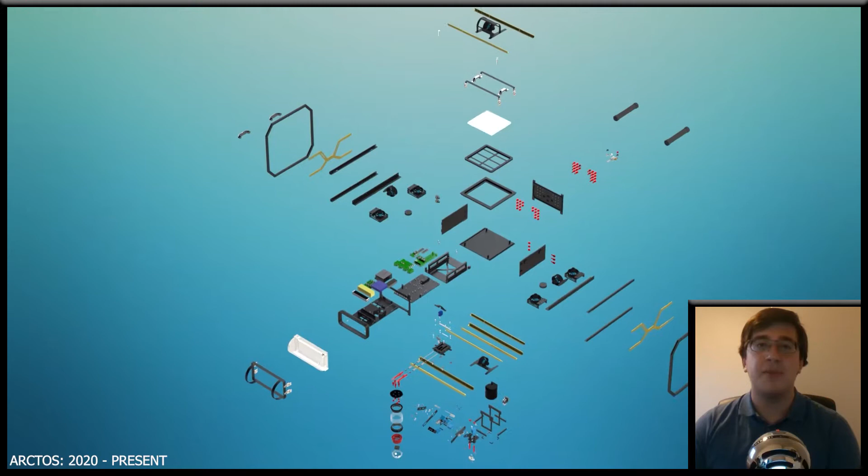ARVP. Hello, I'm Drew Del Ciopo. And I am Jared Schroeder. We're both in our fourth year of mechanical engineering. We're the mechanical co-leads for ARVP. Throughout the past year, we have designed, modeled, and manufactured Arctos, our competition robot for RoboSub 2021. Throughout the past year, we have planned, designed, and created to ensure competition readiness of our new robot, Arctos.

Last year, we unveiled Arctos, ARVP's newest creation in a long lineage of autonomous vehicles. The hull is the backbone of our AUV. In order to achieve an efficient hull design, several criteria must be met. The hull must be structurally sound, waterproof to safeguard electronic components, and it must contain enough space to support all critical subsystems, including our torpedo launcher, robotic arm, electronics trays, cameras, DVL, propellers, and more.

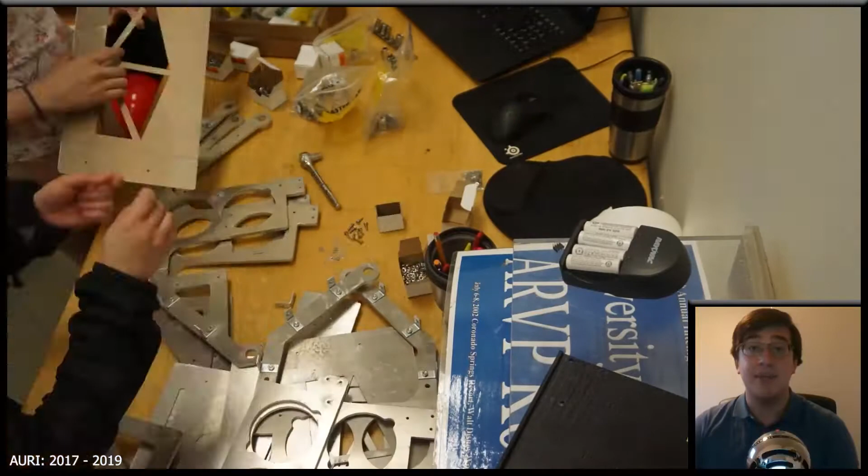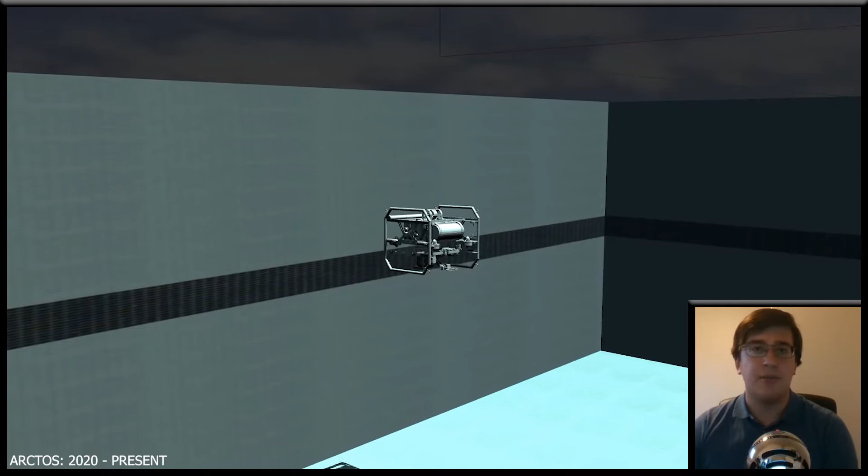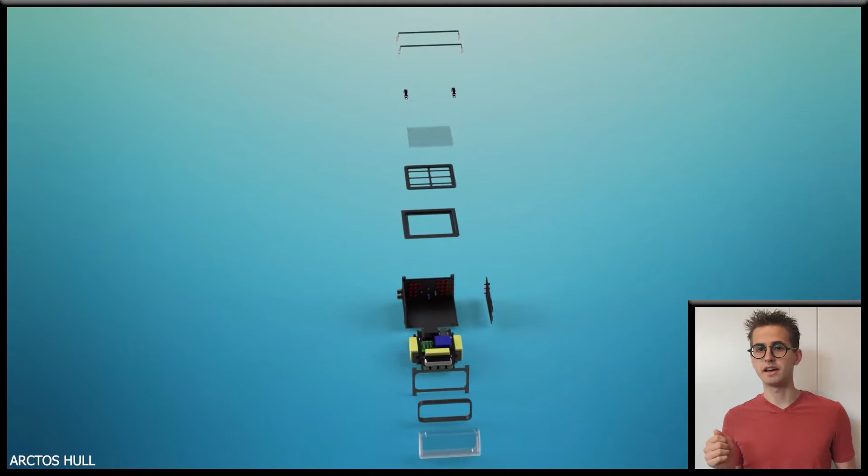A huge design consideration is accessibility, the ability of a team member to manipulate, add, or remove components from within the hull. This hull design is critical for team success. It must support all other components, and if minor defects emerge, such as failed seals or incorrect dimensions, it can spell doom for Arctos before it even hits the water. Unlike previous designs in ARVP's repertoire, Arctos is the first to feature a square hull instead of a cylindrical one, increasing the usable space to volume ratio from 0.5 to 0.7. This means we can fit more components inside the hull.

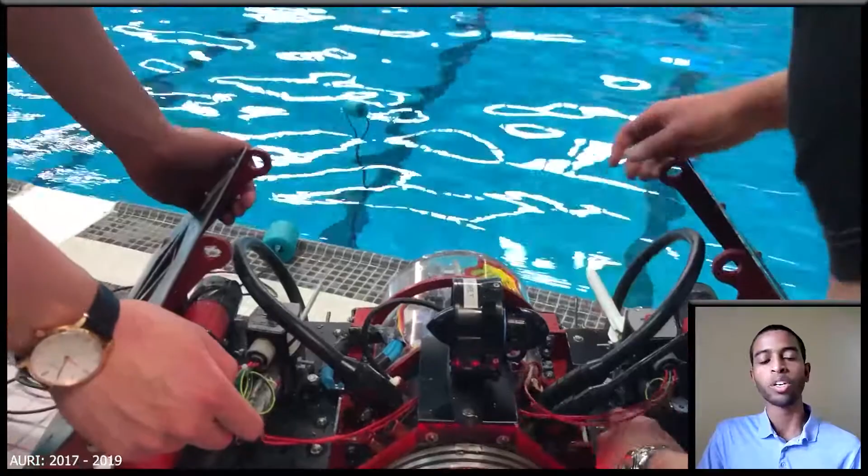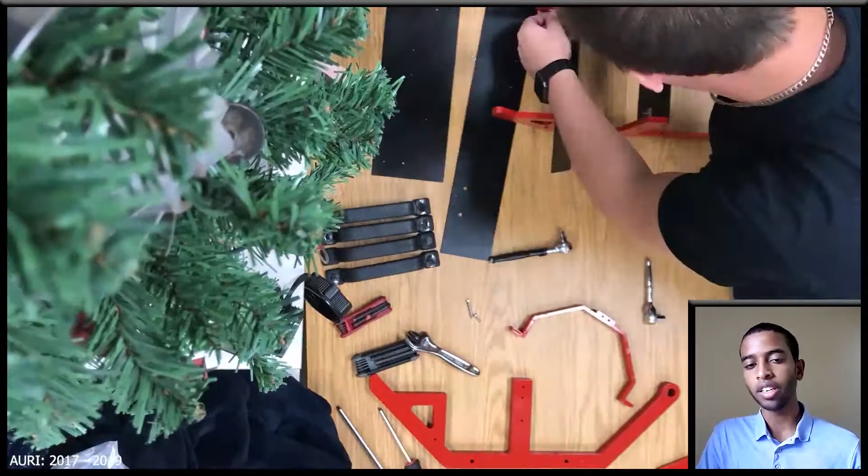Hi, I'm Abdallah. The square hull creates many engineering challenges related to waterproofing and structural integrity due to stress concentrations along the hull's edges and faces. The team paid particular attention to clasping mechanisms, seals, O-rings, wall thickness, and manufacturing methods to ensure leak protection and reduce the probability of various failure modes. The 6061-T6 1/4 inch thick aluminum hull makes Arctos lightweight and strong. It is hard anodized for increased durability and longevity. The hull measures 14.75 by 7.5 by 18.5 inches. Overall, the entire robot is 24 by 24 by 28 inches and weighs 80 pounds, just under the design requirements for the competition.

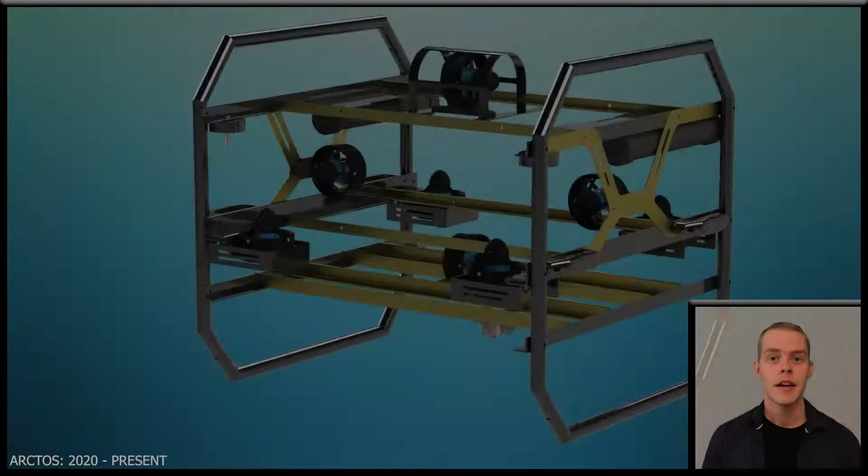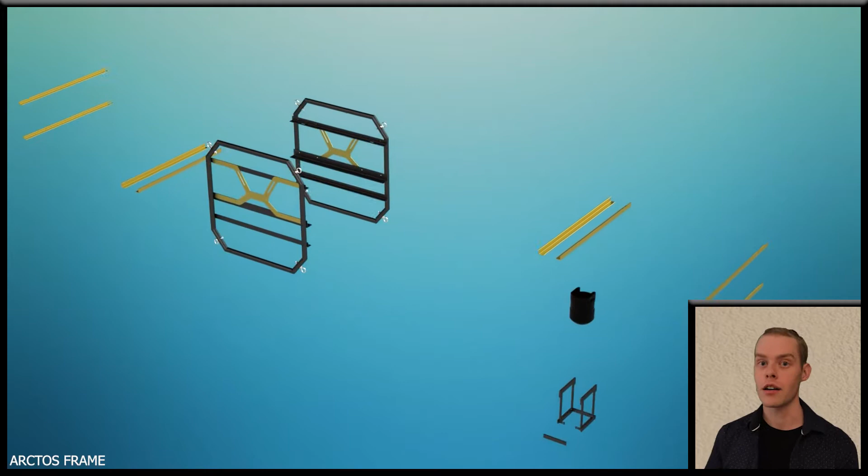The hull is the basis for all other subsystem designs. 8 propellers are connected externally that not only control the thrust, but also the roll, pitch, and yaw of our robot, giving us 6 degrees of freedom. The square hull and skeletal frame promotes flexibility in the attachment of external mechanical and electrical subsystems, such as the 3-axis articulated claw, torpedo launching mechanism, and cameras. This design is advantageous because we have complete control in customizing the position of all these external subsystems, so that we can easily modify our design to best satisfy competition objectives and our strategy.

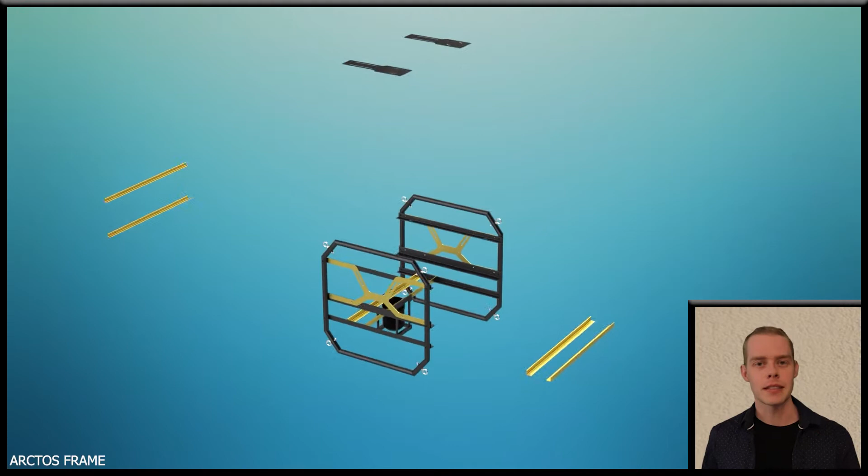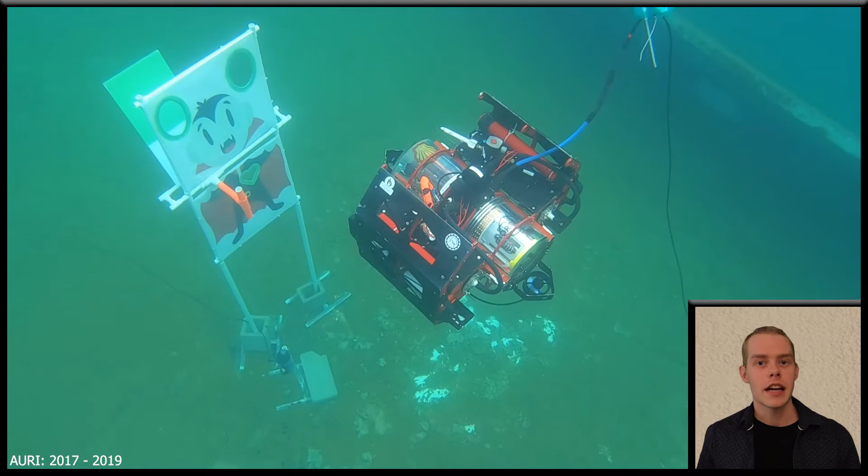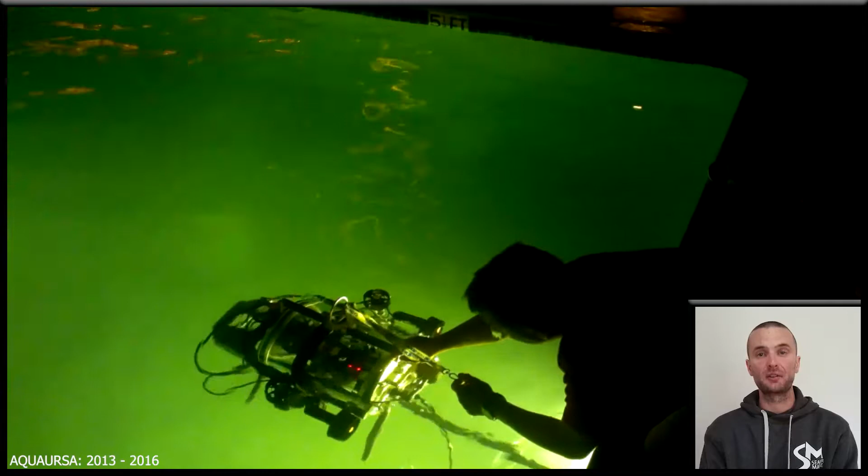Previous AUVs designed by the team were unable to satisfy certain task requirements due to design limitations. For example, AURI was unable to fully satisfy the collecting bins task because it lacked an articulating claw. Its predecessor, AquaUrsa, was large and cumbersome and had difficulty controlling its 3 axes of rotation, particularly pitch. Both of these shortcomings were related to hull design. We have learned from our mistakes and implemented the solutions into our current design; making the hull sleek and the design modular has solved previously mentioned issues faced by other ARVP robots.

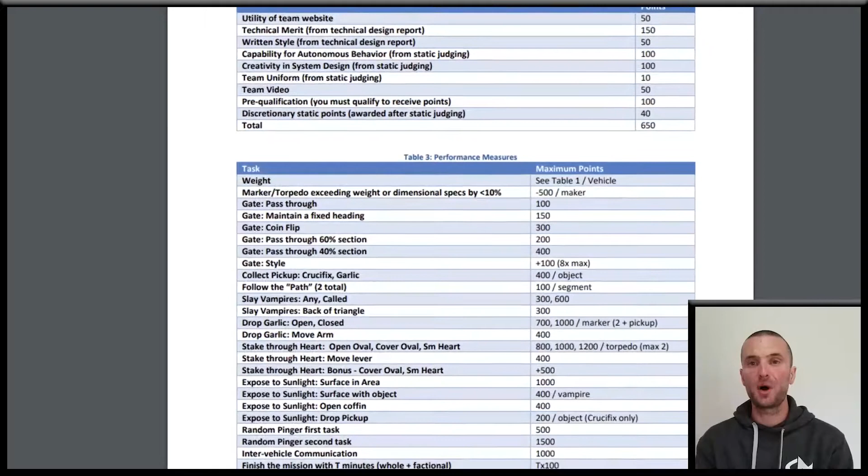Based on our current mathematical models, simulations of Arctos, and our achievements in previous RoboSub competitions, we can estimate our performance in the 2021 RoboSub competition as if it was in person. For the following analysis, we are referencing the point breakdown model from the 2019 RoboSub competition. For our hypothetical competition run, we assume that we take the G-Man path.

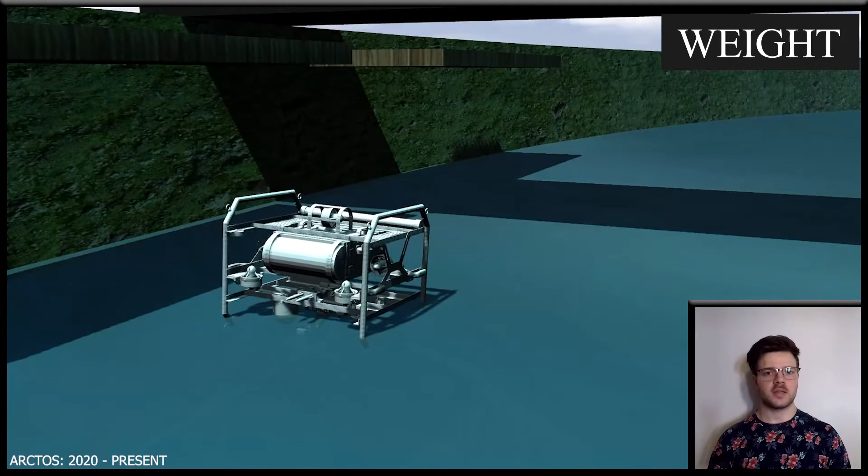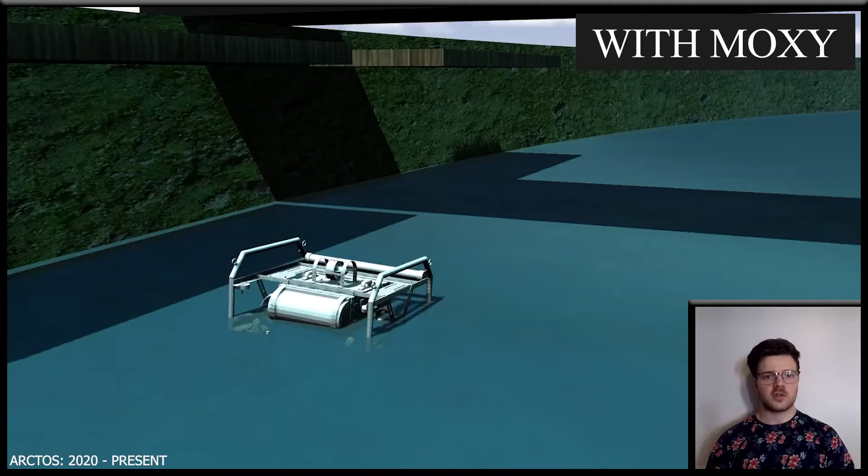Based upon weight and size restrictions, Arctos weighs 80 pounds. Thus, we will receive a 7.6 point bonus. We begin the competition either facing perpendicular to or away from the gate, decided by a coin flip. Arctos can handle either scenario and rotate to find the gate with 100% confidence. We should be easily able to pick the G-Man side of the gate.

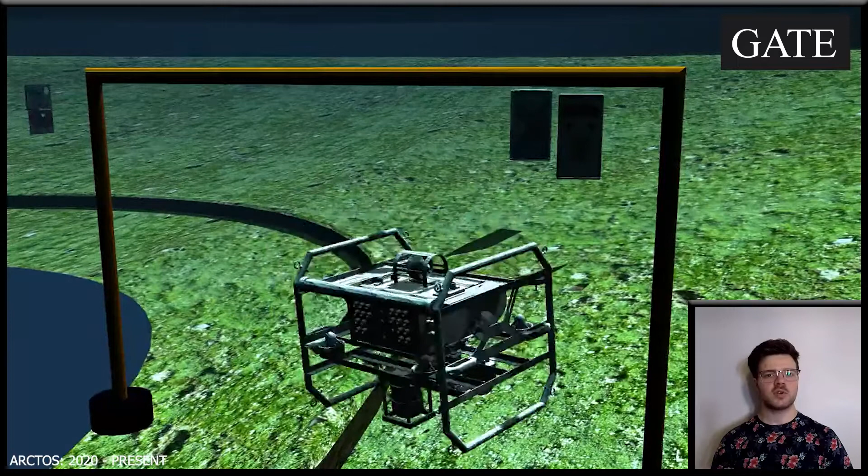Our computer vision algorithms have improved from past years, and we should be able to follow both segments fully with 100% confidence. We assess a 95% confidence of correctly ramming the badge buoy, thus completing the task. This task has a lot of complexity. As our claw is a new subassembly, we may have difficulty lifting the covers off the bins. Thus, we will give this a confidence of 60%.

From past years, we have not attempted the dropper challenge. We have a newly designed, streamlined torpedo dropper, which should be extremely accurate, and expect a 70% confidence of dropping into the G-Man barrel. We've been perfecting our torpedo technology for years, and have an improved system this year by including a 3D stereo camera.

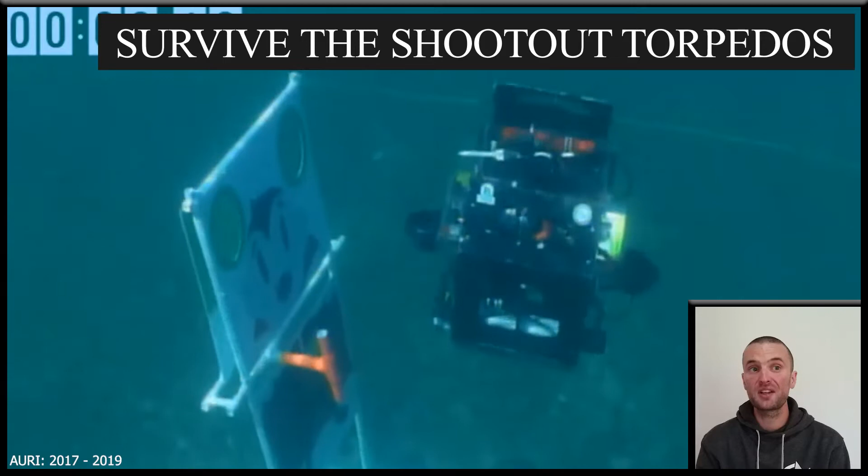There is a lot of variability and uncertainty related to this task. In 2019, though, we narrowly missed by an inch. With the added stereo camera, we can more precisely determine our distance to the target and the exact location of the torpedo target. We assess an 85% confidence for this task.

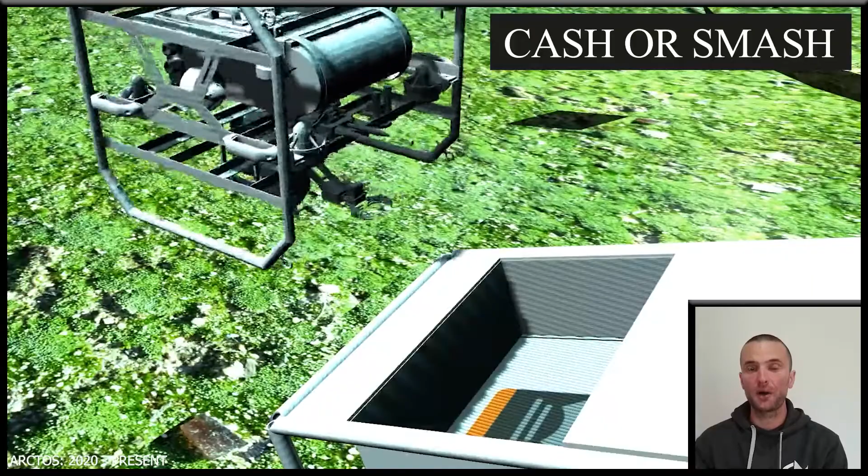We have learned from experience that navigating to and surfacing inside the octagon is of no difficulty. However, combining both computer vision and claw manipulation remains a hurdle. Overall, we should reach the surface with 100% accuracy, surface with the bottle at 60% accuracy, and move the bottle to the G-Man X table with 60% accuracy.

From our simulations, we would expect to take up to 14 of the available 15 minutes. From a hypothetical assessment of the criteria mentioned, we would expect to earn 6,507.6 points.

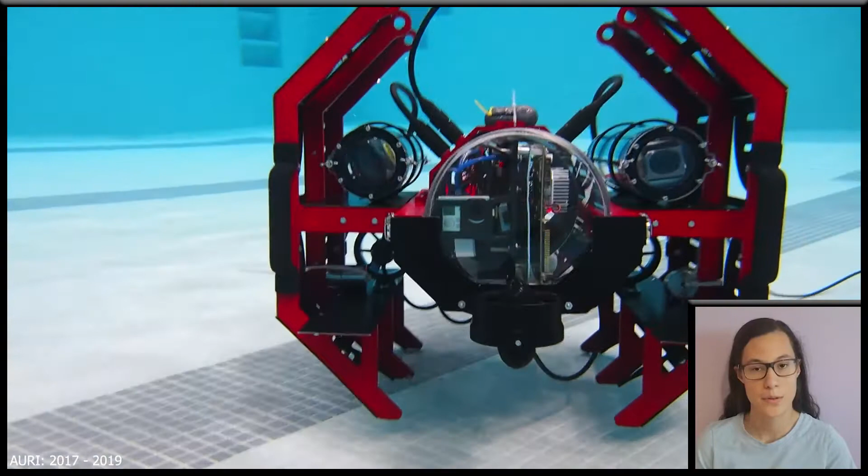Arctos has been in development for 2.5 years. We've been fortunate enough to rely upon the experiences of previous members and the extensive knowledge they've supplied from our team's 25-year-long operation. With the accomplishments and shortcomings of our previous robot Auri, we knew how to improve upon its design when creating Arctos for this year's competition. All of our design components go through a similar development cycle. We begin by understanding the goals and requirements of the system.

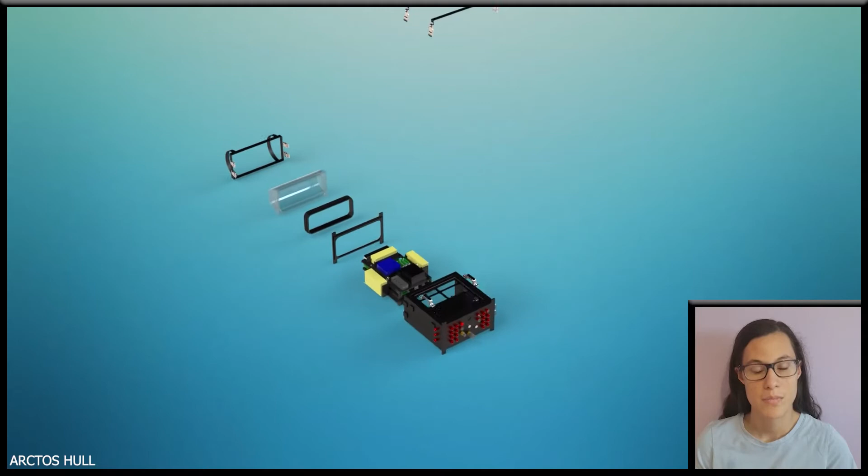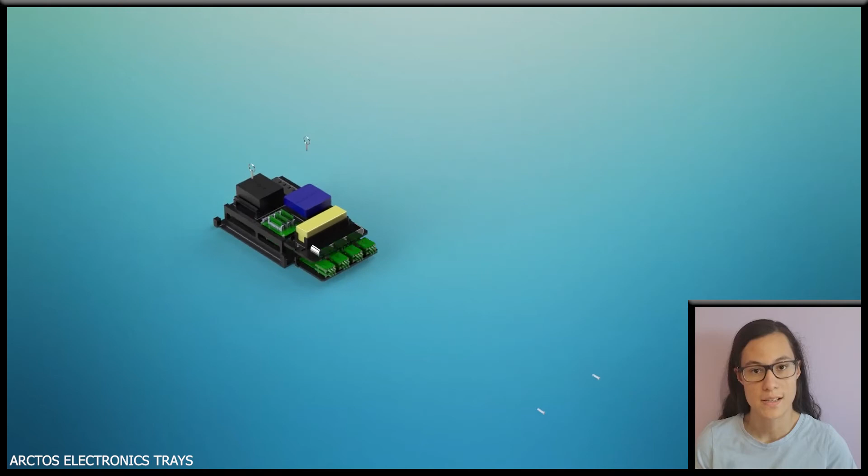For subassemblies such as the hull, we begin by asking basic questions. How do we make it structurally sound while respecting the weight limit? How do we make it waterproof and prevent corrosion? How do we make internal systems more accessible? What hull shape best lends itself to our goals? From these questions, we can assess the validity of different designs using simple tools such as weighted decision matrices and risk assessment matrices. We can further our inquiry by using more technical design platforms.

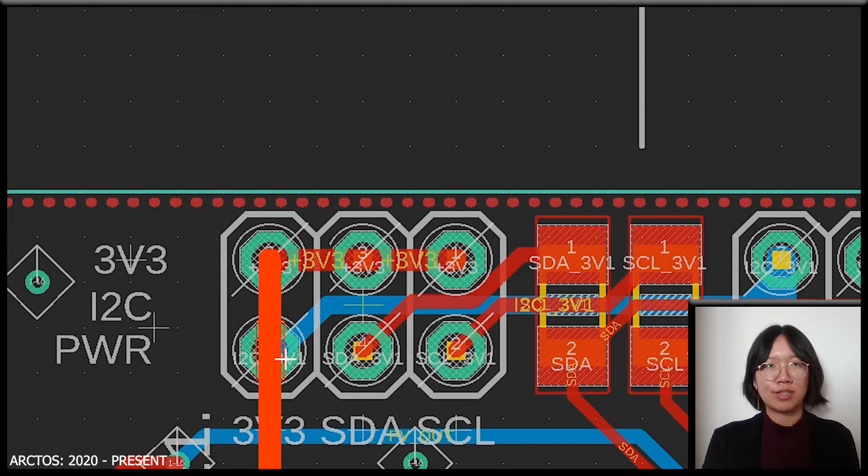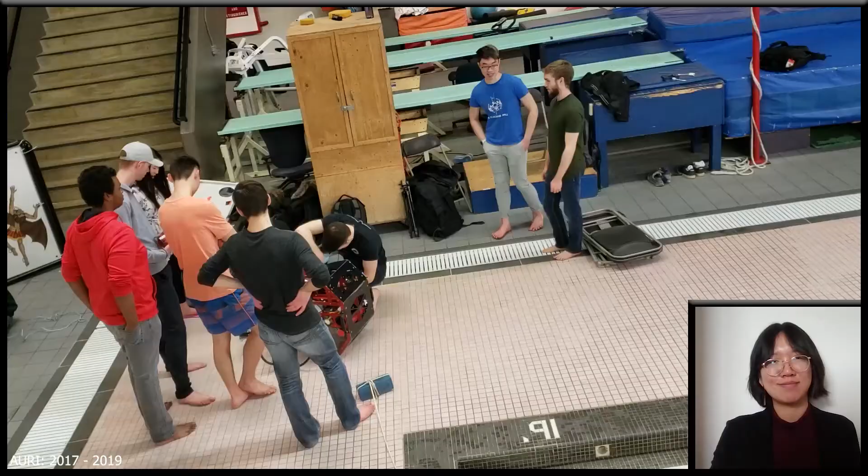Considering the hull, we can assemble our ideas in SOLIDWORKS, test out stress calculations in ANSYS, and gauge the robot's performance in Gazebo. Once our robot is fully assembled, we take it to the local pool to officially test our work. It is a team effort to collect data and gauge the robot's performance. From the results of these tests, we take it back to our original questions to further improve our designs. This is a scientific method in a nutshell.

This past year has been challenging for us due to the COVID-19 pandemic, as we're sure it has been for many teams engaged in RoboSub. Campus, work sites, and pools were all closed through the entirety of the pandemic, making a lot of our initial desires and wishes go unrealized, with many of us having to work in our homes. Despite all these setbacks and obstacles, ARVP has continued to thrive and engage its members meaningfully. ARVP has been quintessential to our members' university experience, like mine.

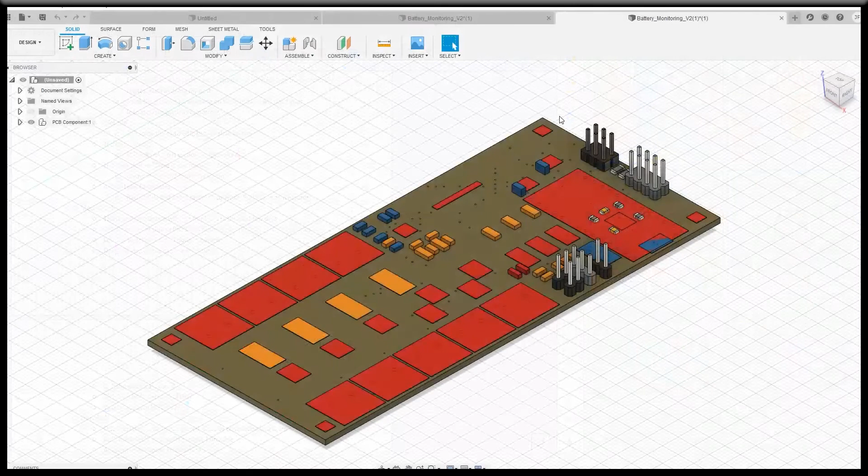The occasional game of Scribble.io, Unrailed, and Minecraft were also beneficial, not to mention the ARVP Vault server for working on solid models remotely. Like this one. We have quickly and efficiently adapted our workflow and goals in the face of adversity by moving team functions online. Our team relies upon digital mediums for communication and coordinated remote work. Remote communication promotes greater flexibility in relation to work sessions and meeting time and has thus been extremely beneficial. Members could work on their tasks at their leisure in response to flexible deadlines.

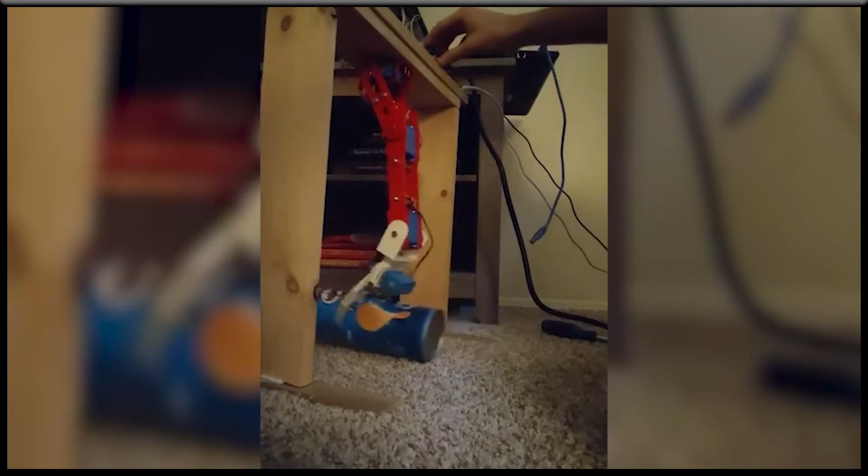In our current phase, Arctos' major components are being assembled and tested individually. As more vaccines become available, COVID-19 cases will continue to decline. Our team has been working super hard with our supervisor, Dr. Lipset, to create a plan for return to in-person work on campus. We hope to return to regular team operation and to fully assemble Arctos and test its functionality by the end of the summer. That means we'll have an entire year to improve Arctos and be ready for RoboSub 2022.